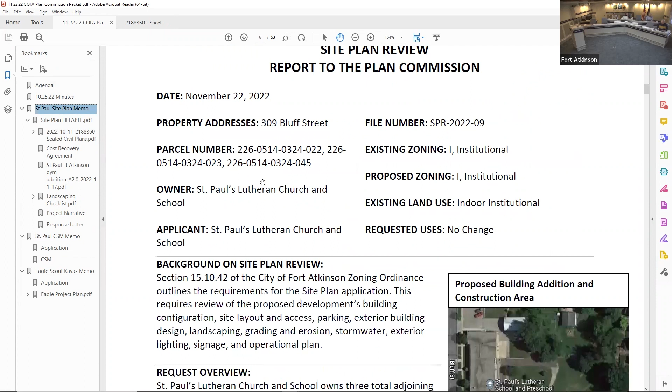Next on the agenda, review and possible action relating to a site plan review for St. Paul Evangelical Lutheran Church School Gym Building Addition located at 309 Bluff Street.

This is a project that I think has been a couple of years in the making with the proposed addition here. We've gone through a couple of iterations of the building itself, design and layout and things of that nature. I think what we have before us has full support from city staff.

This is going to be an addition, a gym recreation area on the backside of St. Paul's. This has some pretty significant topography off of Bluff Street there. For those not familiar with the site, it slopes off down to the east a bit, which created some stormwater or runoff concerns with the adjacent neighbors. Those concerns have been taken care of within the design of the structure, and I don't think we'll see any major impacts associated with this addition.

The other side of the project that was a bit of a challenge to fit in was the aesthetics of the building itself. At its face, the challenge was we're building a gym, and typically a gym is a large pole-type structure you can add on to a building fairly inexpensively. But within the city environment, and particularly within this residential, mature residential neighborhood, the zoning code requires some improvements to the aesthetics of that addition, which St. Paul's has done a great job accommodating.

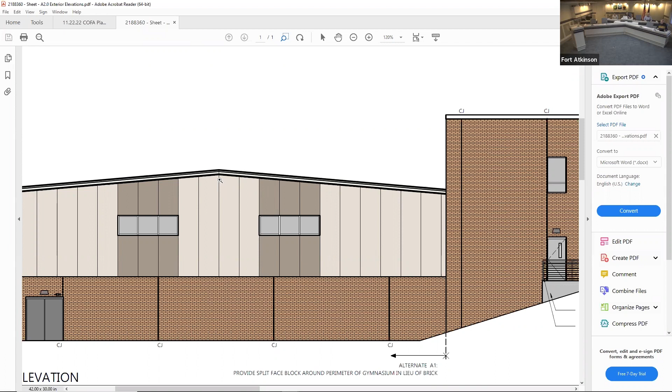Any questions, comments, concerns from the Plan Commission? I've got a question, if anyone would be able to speak to this - is this going to be during school use, after school use? Is it going to provide other opportunities for youth to have a safe place to go after school? What are some of the determined usages for this facility?

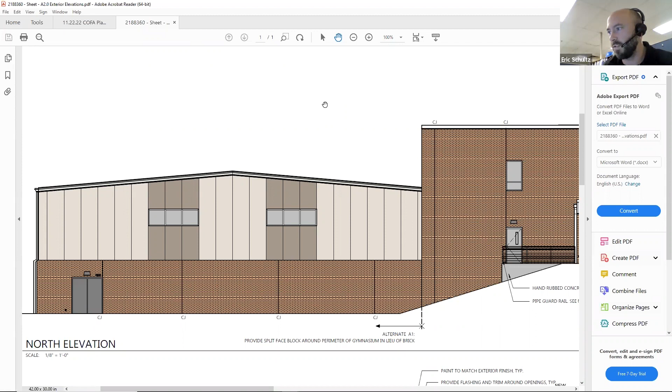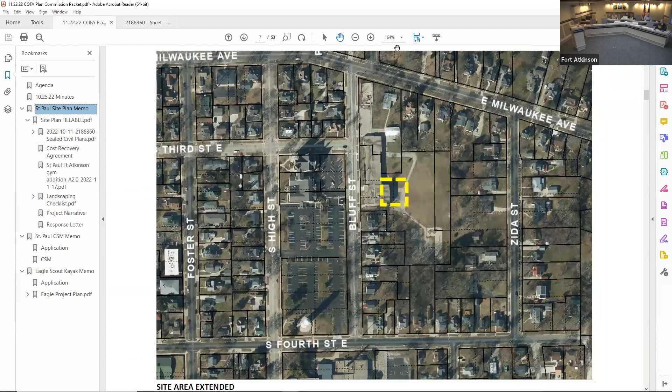I'll second. Okay, there's a motion and a second. Any final questions or thoughts from the Plan Commission? Hearing none, all those in favor, please signify by saying aye. Aye. Any opposed? Okay, that motion carries.

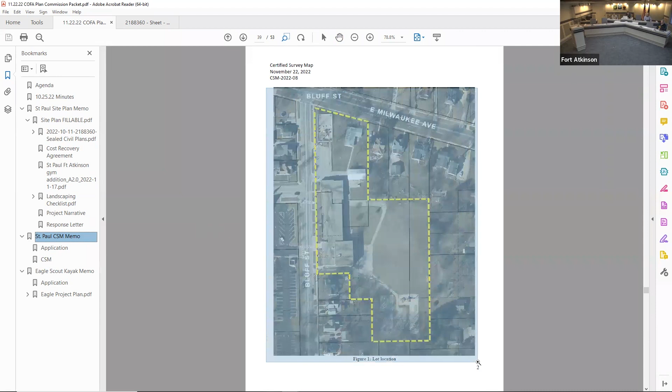Next on the agenda, review and possible recommendation to the City Council relating to a certified survey map for St. Paul Evangelical Lutheran Church for the property located at 309 Bluff Street.

Thank you. So this is a follow-up to the site plan approval. There are a number of parcel lines within this area, which you can see here in black on the screen. What this CSM does is simply eliminate all of those individual parcels and combine this into a single lot, which is very much in keeping with what the city wants to do in these situations to make the interior lot lines go away. This allows us to better enforce the building codes and setbacks and things of that nature.

The only thought we had on the city side was the residential parsonage up in the upper right-hand corner, whether that should be kept on its own lot. We reached out to St. Paul's and asked the question, and they intend to leave that as part of the larger parcel, with some potential plans for that building in the future. So leaving it on the lot, I think, is a good idea in this situation. I'd be happy to entertain any questions the commission members may have, but this is recommended for approval by city staff.

Just to note that this would be a recommendation to City Council, as the City Council would have the final approval for this item. Any questions from the Plan Commission?

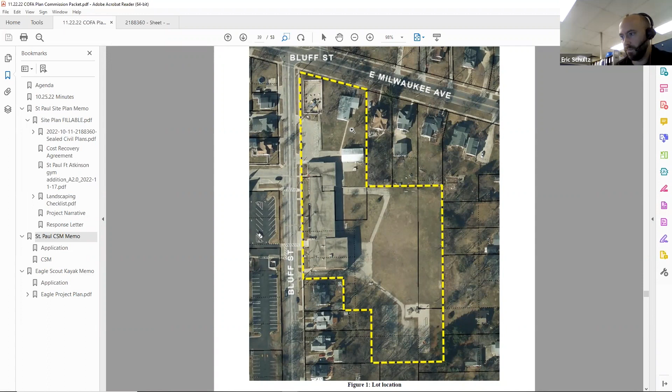Can I answer any other questions? Hearing none, I would entertain a motion to recommend the city council approve the certified survey map for St. Paul Evangelical Lutheran Church for the property located at 309 Bluff Street. So moved. Thank you. Second.

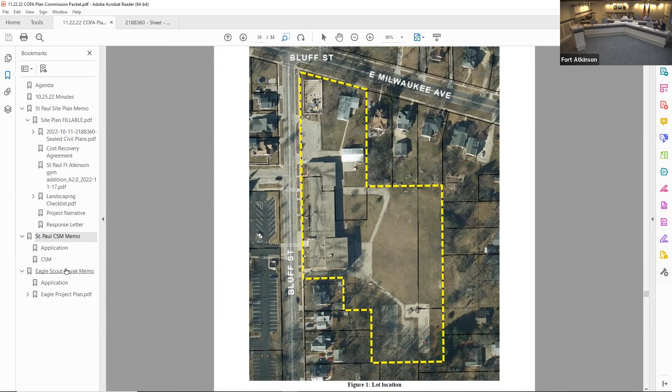Thank you. Any final questions, comments? Okay, all those in favor, please signify by saying aye. Aye. Any opposed? Okay, that motion carries.

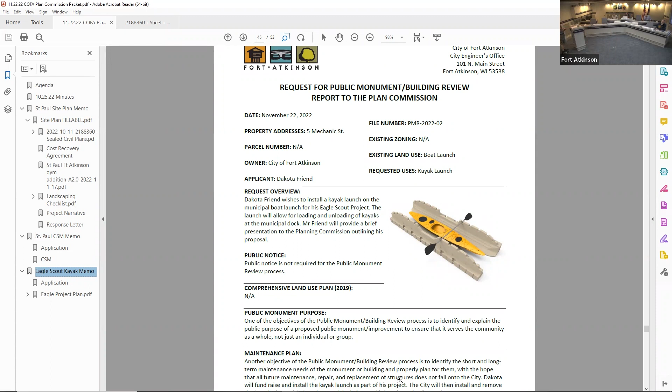Next item on the agenda is review and possible recommendation to the city council relating to the request for a public monument review for a kayak launch on city-owned property located at the municipal boat launch on Mechanic Street. Thank you. We have Dakota Friend here. He's going to give a short presentation on his proposal to city staff and the plan commission. This will go through both the planning commission as well as the city council for our special public monument review. Dakota, let me get you set up here and then I'll give you the mouse.

My name is Dakota Friend. I'm a Boy Scout from Troop 147, currently working on my Eagle project, which is the installation of this kayak launch.

So here's a couple pictures of the site.

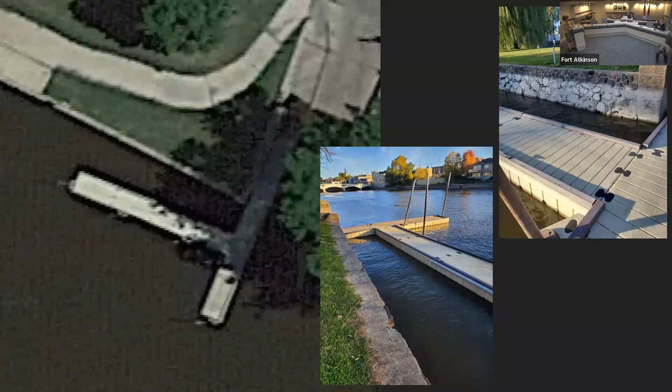The project would consist of purchase. I would raise money and purchase the kayak launch and 4 of the bow tie connecting pieces, these black bow tie pieces. The kayak launch itself would be assembled right in this area on the innermost side of the dock, between the dock and the wall.

This placement right here would not interfere with any boat traffic, but it would allow for kayaks to come in through this area to get in and out of the kayaks.

This piece would be able to be assembled on land and then floated into the water, so there wouldn't be any complications with trying to assemble anything in water.

It's also out of the way of the anchor points for the dock, and it won't interfere with the dividing guard rail things for the visually impaired. Those would just go right over top, so it wouldn't interfere with any of that.

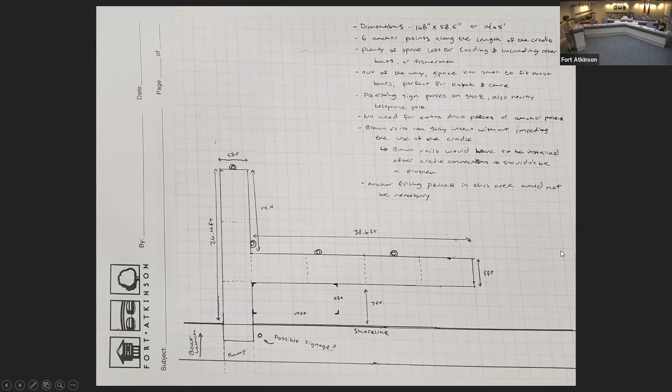The last part would be putting up a sign. The sign would have my name, the project, the date that it was put in, and the list of sponsors that helped to fundraise this project. That's all I have.

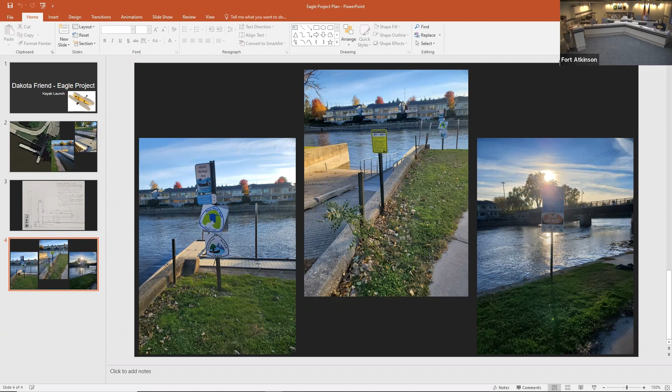I also think it's a great idea. I would move to recommend that the city council approve the request for a public monument review for a kayak launch on city-owned property located at the municipal boat launch on Mechanic Street. I'll second it. Okay, we've got a motion and a second. Any other questions or comments from the Plan Commission on this matter?

One comment I have is please feel free to reach out for a donation from your local planning commission member, Eric Schultz. Again, this is something I look forward to using myself, so if you want to reach out for donations, I will get you my contact information.

I will also mention it was a pleasure to work with Dakota on this project, and we're very appreciative when folks have Eagle Scout projects and contact city staff early on to make sure it's a project that serves a public purpose and that we can support at the Plan Commission and City Council level. So I want to thank Dakota for pursuing that and for working with us over the last couple months on this project and being flexible on where it goes.

So there is a motion and a second. All those in favor, please signify by saying aye. Aye. Aye. Any opposed? Okay, that motion carries. Thanks, Dakota. Next on the agenda is adjournment.